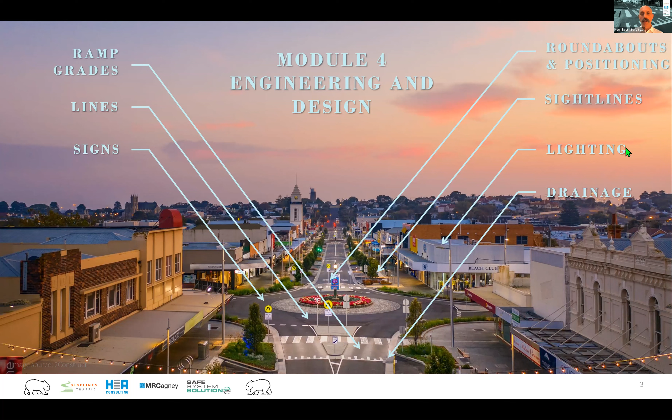Anybody from the Warrnambool region, always interested in people's opinions of the roundabouts. It's a good polarizing the community one, which is always fun.

Okay. I want to start by just really recapping, I suppose, design objectives. And that's come about from a lot of the stuff you've heard from Hafez, from Prue, from Bridget, and it's just sort of reinforcing some of this. But we want to locate those crossings on desire lines for pedestrians and cyclists to ensure that the facilities best serve the road users for efficient and effective crossings. Convenient and traversable by all path users.

We want high alignment with safe system principles, and we want to consider this at a network level. So trying to get that consistency along a corridor and not just sort of isolated picking of crossings, which means that a journey can't really happen for some users or is a very uncomfortable journey.

In terms of design principles, if we jump into that, I'm going to go through these in a fair bit of detail, but I put these days severity first. Now, a lot of designers and engineers don't do that, but I really almost am overcompensating for the lack of view of severity in design, operation, management of our transport network in the past. So there I've got reduce the severity of crashes by managing speeds for vehicles at the crossing and the conflict point. So then I'm thinking about the likelihood.

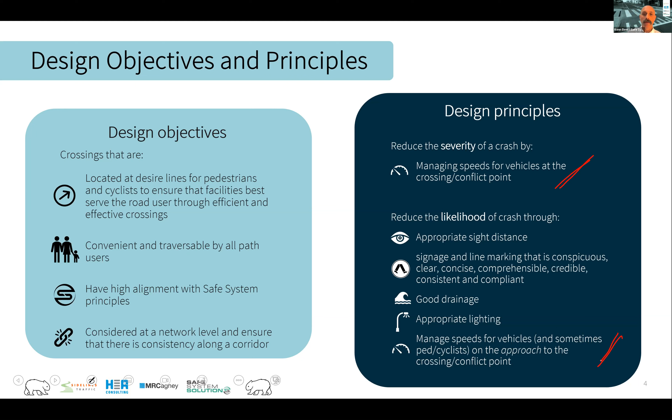So this one up here is about when the crash happens. This one is about trying to stop that crash happening. But I'll get into these in a lot more detail as we jump through it. But I just thought nice few little design principles to start.

But let's get everybody involved, I think, Bridget. Now this one's going to be a thumbs up, thumbs down, or I like it, I don't like it, or good, bad, whatever you want to say. A positive or a negative. So you can see here we've got 2 lanes approaching. This is a 60 km/h speed zone, and you can see we've got the crossing there. So just type it into the chat, either like it, don't like it, or I'm seeing some emoji use. So if you find emojis that cover off your thoughts,

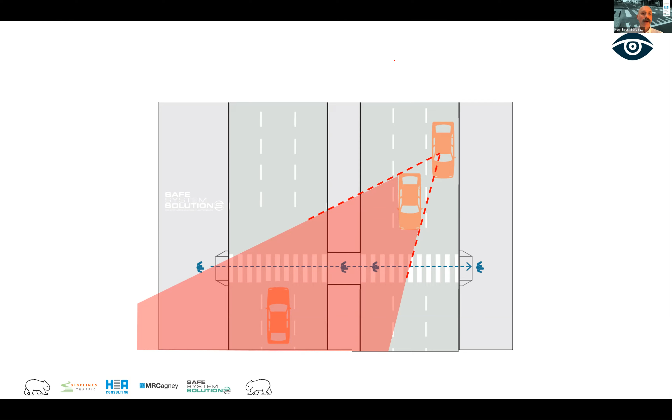But you've got to think about the principles of why these can be an issue and how we can lessen that risk. So let's do another thumbs up, thumbs down on this one, which is also two lanes approaching a pedestrian crossing. And you can see there we've got a somewhat similar setup in terms of two lanes. This one happens to be approaching a roundabout, but give us your thumbs up, thumbs down, or your like it, don't like it, or good, bad, and we'll see what people say on this one.

We've got a lot of thumbs up coming through so far, not too bad. Some people say they're not so familiar with two-lane examples. Some people from smaller, more rural communities, perhaps where urban environments are a bit more simple. Someone said it's okay. Okay. Yeah, I think that there's some significant advantages with this one. The immediate advantage is that it is raised. So anything that happens is going to be at lower speed, more time to react, more time to evade any incident, but also if something happens, it's going to be at lower speed, more within tolerable energy levels. So that's just a big win.

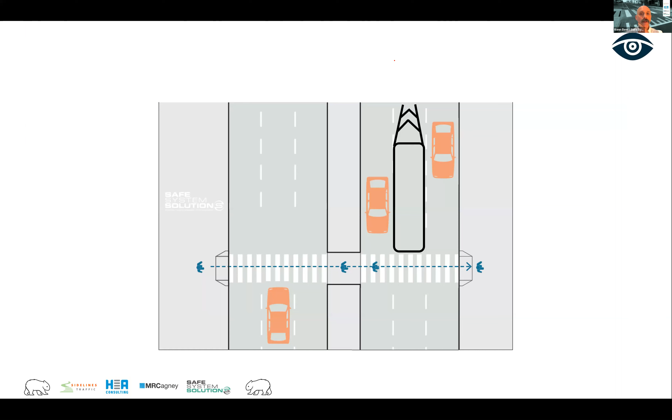The second one is that separation, that sort of refuge island between the two lanes. So if I just jump forward a little bit, same site, and this is in South Melbourne, by the way. Sorry, Port Melbourne. You can see there's a truck approaching the crossing there, but you've got quite good sight lines if you were in this lane. If that separation wasn't there, you can see the significant sightline impediment that would cause if you're running next to that. So, back to that schematic that I put in there, we're really altering that to give that space for a vehicle to be able to see a pedestrian.

Now, there are quite a few scenarios where we see crashes involving pedestrians being struck on these sorts of setups, but when we add this in, they are lessened. There's people overtaking vehicles, slowing down. There's just the ones that I presented, but this is a nice little option. And the raising of it does such significant benefit in terms of further opening up reaction time and sightlines, which I'll get into a little bit more shortly. So I just wanted to start with that one to get us warmed up.

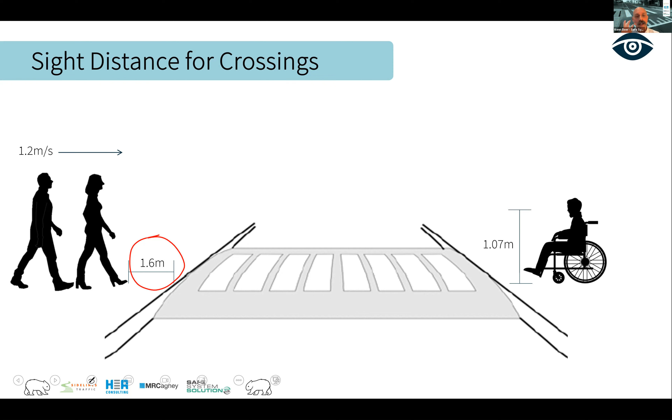But generally, we talk about pedestrians at about 1.2 meters a second. Now, of course, if you are thinking about a crossing where there's something like a park with a track that leads straight in, and we have joggers, and potentially people walking much faster, you're going to have to adjust a factor for that. The distance back we use very often is this 1.6 meters back. And I'll come to that. And then if we're thinking about an eye height for a pedestrian, we tend to go with the 1.07. It's very specific. I think 1 meter would have been fine, but anyway, 1.07. But the general principle we're going for is somebody in a wheelchair or a child, and that's a decent representation. So I needed to chuck those in as initial parameters.

Now, a common mistake, I think, that people make is to simply revert back to what the road rules say in terms of parking on the approach to a crossing. And they use this as a proxy for sightline clearance. So they don't do sightline calculations on the approach to crossings. Now, I think this is problematic in two ways, because there are scenarios where doing that is not enough. And there are also scenarios where doing this is way too much.

And so the first one is bad because we don't believe people will have enough time to react, to evade, and then they strike a pedestrian. The converse is bad because it may mean that we are unable to put as many pedestrian crossings, raised pedestrian crossings out there. So at a macro level, that's serious stuff.

And I have seen councils who just don't budge from this and then do not put pedestrian crossings or raised pedestrian crossings in huge rafts of areas where they want them. But they're saying, well, we can't remove the parking because of all of the chaos that happens when you try and remove parking, which is a whole different issue, which we're not going to get into now. But they want them there, and it's the parking, and then the sight line can't be met. So they go, we can't do it. I'm like, wow, okay, we need to step this back.

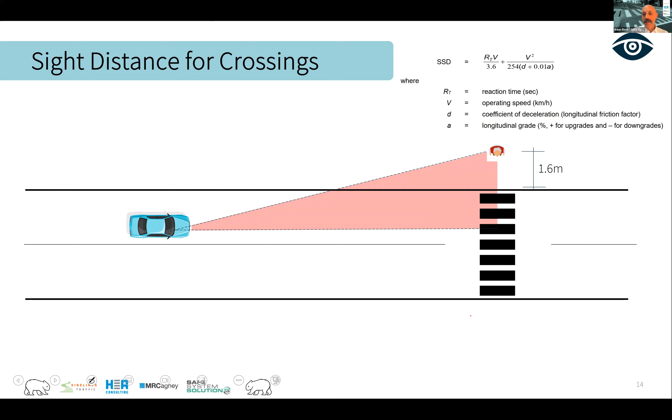Now, let's go with 50 kilometers per hour, 85th percentile flow speed, for example, so you've got an idea of how fast it's going through there. You run that through your calculations, and many of you do this absolutely run-of-the-mill. But you need to work out what reaction time you're going to use. And we know that generally you can use a variety of reaction times, based on the expected environment and the road user's attention to a degree. The large reaction times are very much in high-speed rural freeways and the like, where people are somewhat tuned out. And you go down to a 1.5 second reaction time for these complex environments. There's things going on, it's urban, and that's appropriate to use in scenarios where you're going to put raised crossings.

Of course, you always want to think about the base principles of this before you do it, but that's generally there. Then you think of your coefficient of deceleration and what you're comfortable with. And this is where I err a little on the side of caution, going with the 0.36 there, so thinking about 90th percentile vehicle braking in the wet. Okay. So there are a couple of parameters. You may adjust them, but you're plugging those in. And you do it from 1.6 meters back, as I talked about, and that gives you your SSD requirement, which is 48 meters. Okay, so that's quite a bit of distance that you want if they're coming in at 50 kilometers per hour.

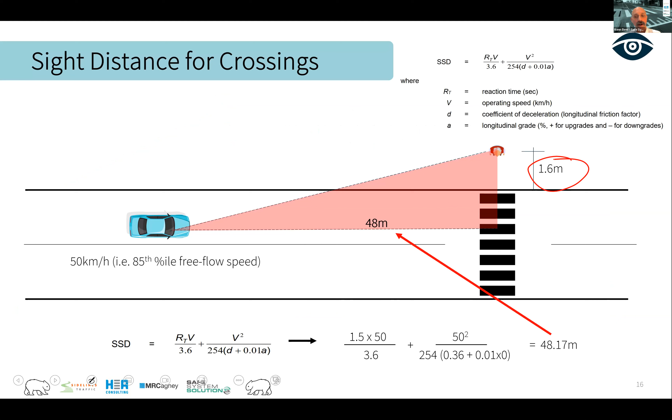So if you raise it then, and this is the raised crossing training course, what do you do? Okay, now this is where industry often goes, oh, I just use the normal zebra crossing one. There's nobody else telling me anything different. So what I find is that we are way over catering for sight distance requirements on the approach to raised pedestrian crossings. And what does that mean? Well, that means trouble in us being able to get a lot of these out. And we want to do what we can to absolutely facilitate these.

So let me give you the alternate way to look at this. And I'm sure some of you have thought of this before, but I'm going to do it. Okay. We're still going to use the same formula, because it's all about reaction time and being able to stop.

So we're going to work out something there. If your ramp grade, so you've designed the grade of the ramp that people will traverse it comfortably at, say, 25 kilometers per hour. This is the other end of the sight line triangle to use. So I'm going to use the same reaction time. I'm going to use the same coefficient of friction, but I'm going to drop that approach speed.

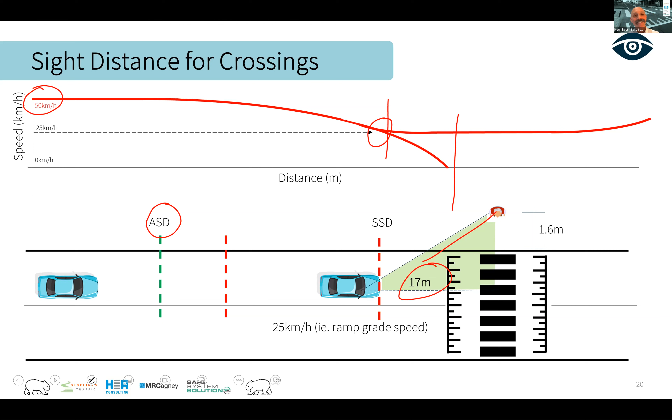So that's just another little diagram just to show we can think about this in a couple of ways. Now, that deceleration I'm talking about, 2.5 meters a second deceleration, we won't get into that. Actually, I lied. We will get into that later when we're talking about cyclists and crossings for cyclist priority. So, tell me though, and I'm going to give a prize on this one, Bridget, if we're having sight triangle issues, I've said raising it's going to significantly help, but what are some other ways we could possibly lessen the sight distance requirement or make it so we're not as concerned about that? Any ideas coming into the chat?

Yeah, we've got one already: upstream traffic calming. Okay, so it's something up here to slow vehicles on the approach. I like that. Give that a prize. I'll give another prize as well, though. Masada said opposite direction traffic. Something we could do about that. Yeah, well, you do the same sight line there. This one has certainly got better sight line often, but you do have to think about, of course, both directions. This is just for teaching purposes.

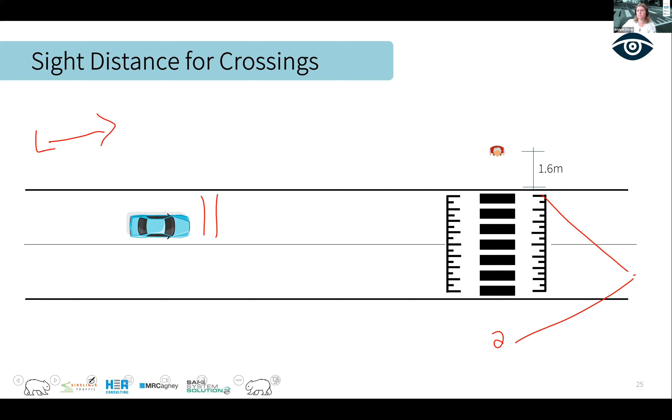And there's been a couple of people said a similar thing, and I think Joseph John was the first to say curb outstands or curb extensions to make the pedestrians more visible, bring them out into the road space. Prize there as well. So I love the fact that two of the things I'm going to talk about have been mentioned already. So it is a thoughtful group, as I mentioned. Yeah, lots of ideas.

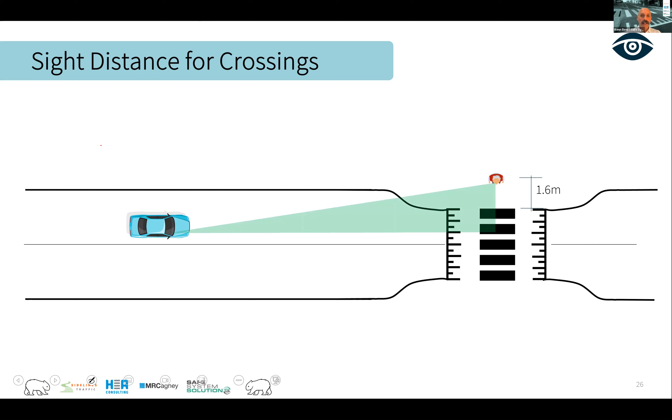But yeah, your curb outstand helps, doesn't it? Because we're pushing that out, opening up those sight lines. So that's one of the reasons we love a curb outstand, or a curb build out if you're from New Zealand. I think that's what you'd call it, isn't it, Bridget? Yeah, usually. Build out. So that's going to lessen your sight triangle.

Okay. There's this really interesting phenomenon, and to me, this is where your details of design interconnect with what we almost believe is important, and I think we stuffed it up. And it may be something that our design standards, subconsciously, if a design standard could have a conscious, subconsciously is written around motorized vehicles.

Because if you look into what sight distance requirements are there for a pedestrian crossing the road at a known crossing point that is not pedestrian priority, right? What we're thinking about is that this pedestrian can see the vehicle, can pick a gap, critical safe gap, and then can dart through that gap. And we've got the typical walk speed, as I put, the 1.6.

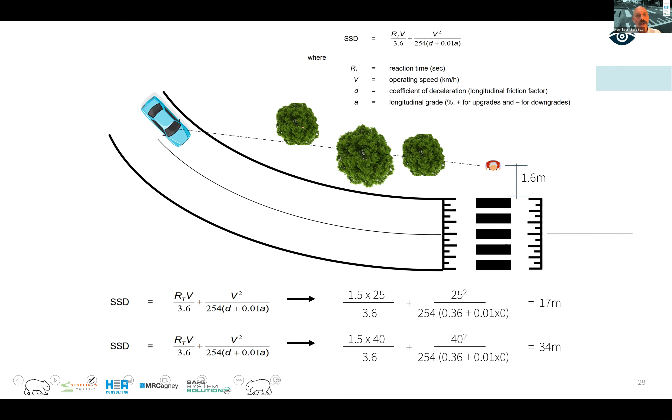So what we can do is think about this as approach sight distance. So a reminder of what approach sight distance is, and I mentioned it earlier. From the vehicle, you need to be able to see at ground level that you're going to have to do something, right? You have to potentially give way or stop or whatever it is. Now, you do that by the vehicle saying, what is that sight line to that facility? So they know that they're going to have to stop.

You say 40 coming in, for example, you measure it along the middle of the lane, and you get it out to 34. So what I'm saying here is the difference between that 60 and that 34 means in some scenarios, it can be framed that we have an obligation to put pedestrian priority, raised of course, at these locations, because we cannot provide a crossing that is safe for a pedestrian if it's not priority, because they do not have time to react and to dart across through gaps, right? But we do have the ability to provide approach sight distance for the vehicle. So they will have time to react and to slow down.

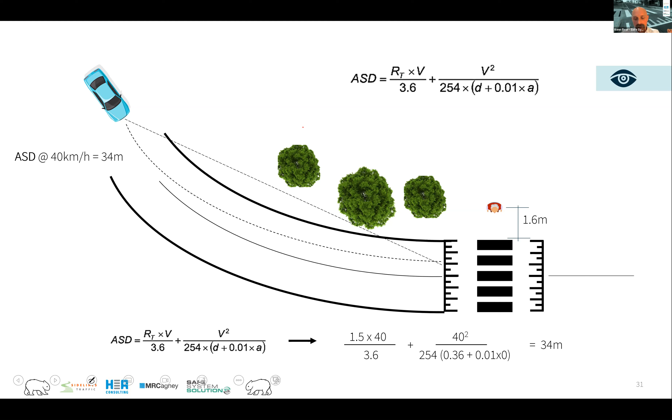They won't meet this SSD, the stopping sight distance, to see that there's a pedestrian, but we are meeting the fact that they do know that. So it's the better of the worst, if that makes sense. Now, the practice, though, is people just ignore the fact that you haven't got crossing sight distance, and sort of push that back as well. We can't do anything else. So anyway, I'll let that boil as I show you where this often plays out.

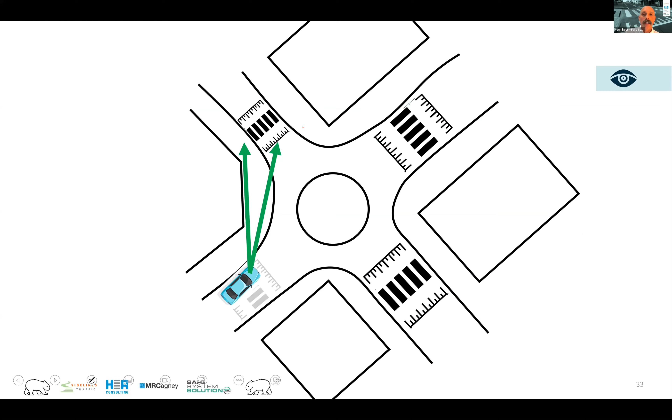Sometimes roundabouts are a good example. So you've got buildings often, and you can't quite meet that. But if you simply are going for approach sight distance, you will meet that, and that makes life a lot easier. That's a wonderful scenario to have. Also, the reality would be that most of the time you'd put speed calming on the approach to all, and then that would slow vehicles and you get better sight lines. Okay. I will come back to slowing vehicles on the approach to crossings to open up sight lines a bit better, but I'm just going to put this one out there.

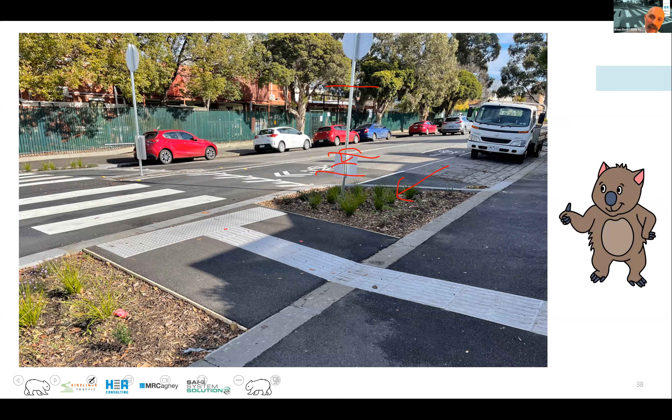Now, this little bit of real estate, oh, it's so attractive to the landscape architects. They want to get in there and do all sorts of fun things with it. And I'm always encouraging of beautifying the areas and the like, but let's keep that to very low shrubbery in those areas and try to minimize the height of anything in there.

Little tip here, and again, I'm back in Warrnambool, lovely Warrnambool. And I think this one's really nice. I think they've done a great job of it. But the tip is to ensure that your angle parking, if you're going to use it, it's not that somebody backs onto the crossing. So if they were to utilize this spot as actual angle parking, you just have some issues often where people back onto the crossing, and it's not the biggest road safety issue out there, but it causes disruption to people's ability to cross and walking around it, and there can be more minor incidents.

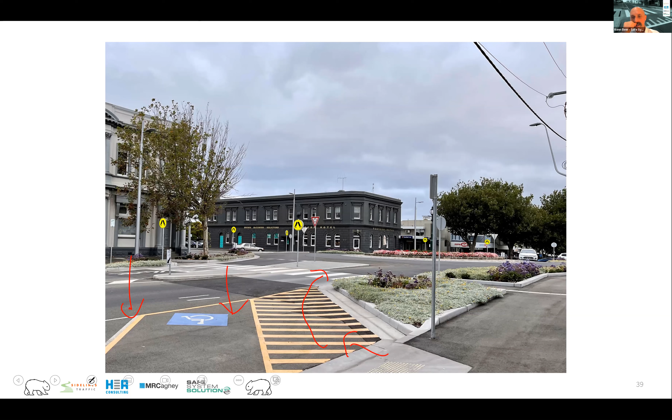But I think this is just a nice use of the disabled car park and the area next to it, and it's open and just works nicely. Nice little design. Okay.

Right, we talked about pedestrians walking towards that crossing. And now I want to think about, what about if we're providing a shared path crossing or a cycleway that has priority across a road? And this is becoming more and more popular, and that's fantastic, right? We're starting to see that in a lot of circumstances, it is right for us to prioritize these modes of transport across a road. So what speed do we talk about for a cyclist approaching? We've got a 1.4 eye height as the one to take there. But what speed are we talking about?

Well, you can go in and have a look, there's a good little bit of literature on this, and I've snipped one of those tables for some different uphill, flat, and the like, so you can get a bit of an indicator on that. TMR in Queensland, they talk about 15 to 25 kilometres per hour, and Victoria will talk about 20 and 30, and I'll take you through that shortly.

But the principle is that, of course, a cyclist is going to be coming in faster. Thus, we're going to probably need to provide some bigger sight lines or some other features to ensure that we've got those sight triangles appropriate. So if we pop in there the 4.1 to 6.9 meters a second on the approach, and we've got that 1.4, let's start to unpack how we're going to work this out.

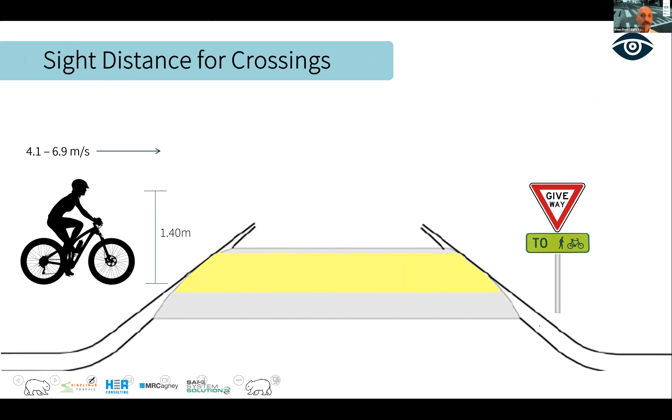Before I do this and start getting into some calculations, we've got a few scenarios. We've got a cyclist-only facility that crosses a road with priority for the cyclist. We've got a shared path facility, and I showed the previous one had the yellow, which is often used as a shared path, but some jurisdictions do them. And then you've got these sorts of scenarios where you have a raised pedestrian crossing, a wombat crossing, zebra crossing style thing, and a bike priority crossing as well.

And in these scenarios, when you're thinking about sight distances, you take the worst. And the worst will be the faster of the two coming in, which is going to be your bike. However, you might want to adjust a little bit on, say, this scenario out here, because a bike is going to have to slow to make that turn, aren't they? That's very different to a scenario where the bike facility comes straight across the crossing without that turn.

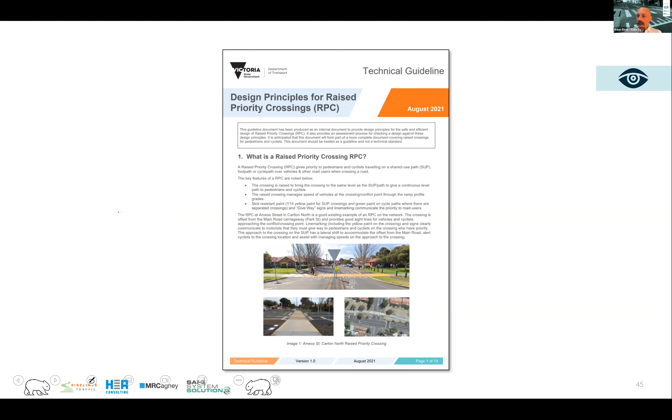I think that the best document out there, or that's done the most thinking about this to a degree, is the Victorian Design Principles for Raised Priority Crossings document released last year. There's some good thinking in this. Like any design, you need to be context sensitive, you need to think about your local circumstances and all of those sorts of things, but I think this is a good starting point. And I'm going to walk you through how to think about those sightline parameters. And then we'll have a pause for a coffee break, I think.

Okay, so the way this works, and I've put that actual document in the learning management system in the resources, but you can also look at the notes here. The way you do this is again, it's based off, say, intersection sight distance or stopping sight distance. But what we've got here is what we call a travel time. Now these travel times are scenario dependent. So we will think about a travel time for a high speed environment being 5 seconds, so some observation time and reaction time, all the way down to these very constrained scenarios, urban environments, low speed and the like, where we're dropping our travel time down to 2 seconds.

Now, for the real design fanatics out there, travel time is usually called decision time in some sight distance calculation workings in the background. But the point is that you're going to think about, okay, what is the scenario of this crossing generally? What's this environment? And then you're going to pick one of these that's appropriate.

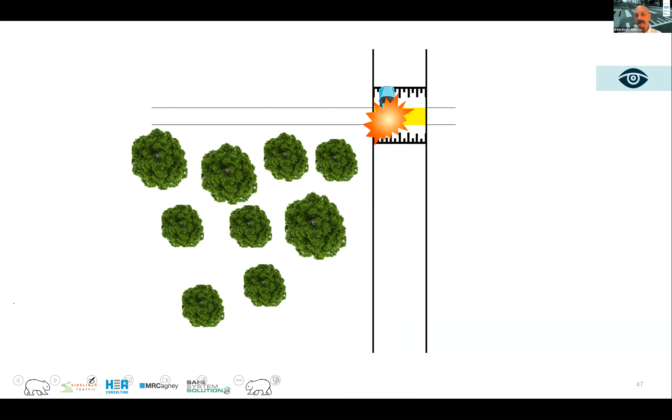Okay. So what we're trying to stop here is that scenario where there was just not enough time for the vehicle to see the bike and the bike to see the vehicle. So we're going to want to have some sort of sight line opening. And I realize as I do that, a tree disappeared, which we just talked about. That's not the idea. I should put something else there that we can get rid of. But what I'm going to say is there needs to be a distance back for the cyclist, and there needs to be a distance back set for the vehicle. For our pedestrians, we were happy with the 1.6 back, but we're not okay with that for cyclists because of the pace they're moving. But what distance back do we go?

So once we do have appropriate sight triangles here, we know that we're either going to have the vehicle approach, see, and stop, as you saw in the little video of myself riding, or we're going to have the vehicle overshoot it for some reason, but the bike will have enough time to make that decision. Oh, okay, this doesn't look like they're stopping.

So what we're going to do, I've got 3 different scenarios, but let's take this one, which is actually quite a common one now. I really like it, where we're seeing a shared path or an off-road bike facility running parallel with a major road. It's usually because we've got road reserve there, and we can use that to build this facility. We separate it because that's really highly aligned with safe system principles, because you're not mixing it with vehicle traffic.

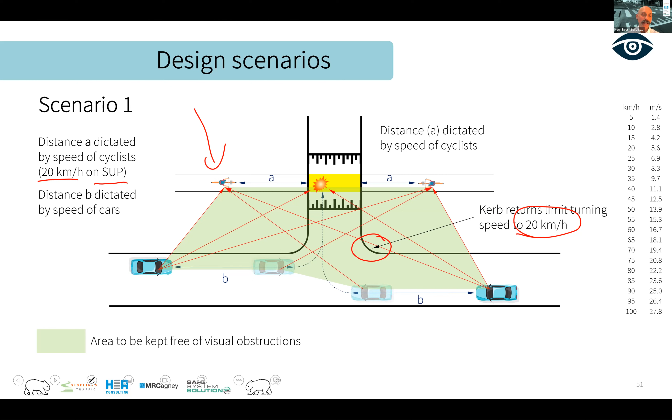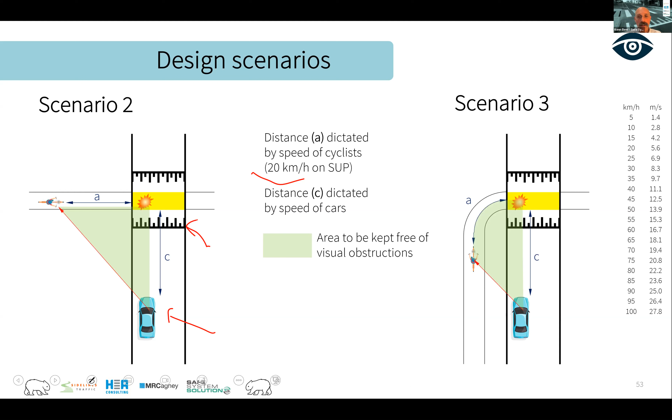So you've got those parameters, or it could be this one where you're going to take shared user path in there, and you're going to take your usual 85th percentile speed of vehicles approaching, or if it's raised, which you hope it is, you can go back to the thinking that we had before. Sorry, same scenario, it's just sometimes we see them crossing like this. You're going to pick that travel time, and then you're going to go to this table, which talks about a distance A, which is how far back the cyclist would be.

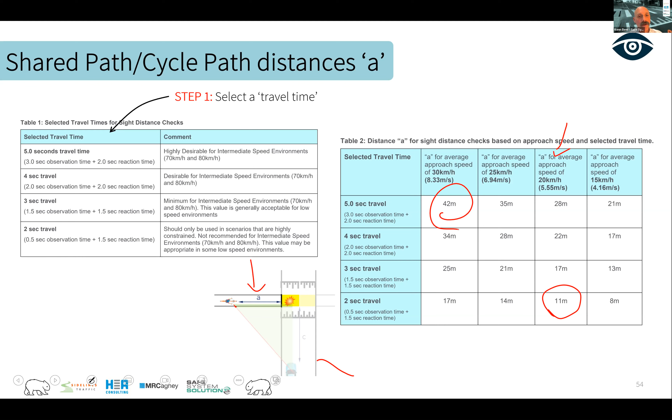And you can see there, for a shared user path in a constrained environment, you've got lots going on, we can talk 11 meters back is what we're thinking. If you've got a cyclist-only facility and high approach speeds down here, we're talking big sightlines. Now, I'd be concerned about these ones with the high approach speed of vehicles. It's always a concern, but that's the sort of way you use that table. And you can see there that you've got different speeds in there for the approach cyclist. You pick one of those.

And then you get your B or C, again from another table. You've already picked what your travel time is. You're using the same scenario. And then you've got the operating approach speed of the side road there, or in this one, it's the speed of the vehicle here, not the 20 km/h turn one, it's that approach speed, so time to know that they're going to have to react. So hopefully that clarifies it. There's a few assumptions in there, 2.5 meters a second deceleration, flat terrain. You may adjust for those.

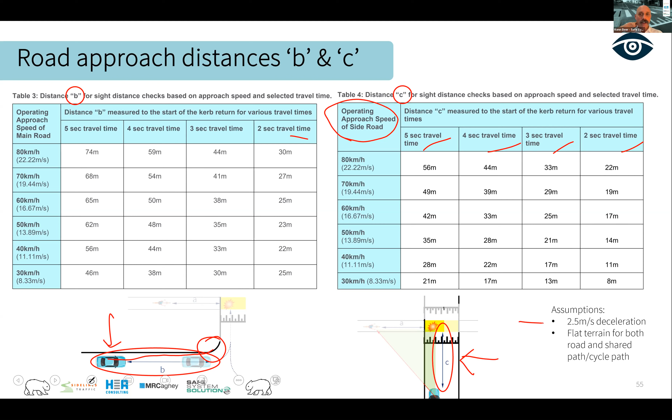So in these sort of scenarios, if you've got a 3 second travel time, you're going to take a 20 km/h shared path speed of cyclists, and if you've got the blue vehicle coming in at 50, for example, you may elect to go lower because it's raised, but you can see there that you're talking about these 17 and 20.

No, I was going to get everybody to answer that for me, but I think I'll just go through these myself, and then we'll stop for that break because we're about half time.

Okay, so if you can't meet those things that you spit out, well, you can implement speed management for the cars, okay? And that's going to help.

And we heard somebody come up with that idea, advanced speed management. Further advanced speed management is good. You can also slow the cyclist down. And there's certainly lots of examples from around the world of raised speed hump style for cyclists, but also the chicaning in. That can be also an advantage if you have a side road coming in and you've got a bike path that's running along here, and you deviate it back like that.

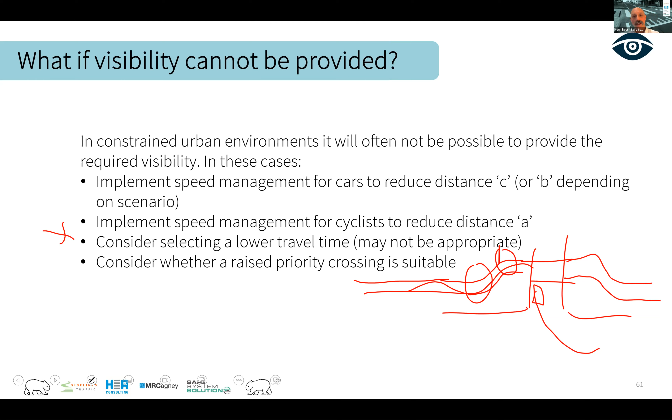I was really pleased with my many discussions and challenges with the Department of Transport on some of this, because it's a little bit conservative to a degree, but they said since its release, and they've been involved in many projects, this guide note has never stopped a priority crossing for pedestrians and cyclists going in. It's simply that they've worked to do things like slowing the vehicles on the approach.

And there's a couple of questions here. One about if we do speed management for cyclists, which I know is not necessarily something that we've got a huge amount of evidence about effectiveness and things, but does that affect Disability Discrimination Act stuff for pedestrians, especially if it's on a shared user path? On a shared user path, that probably wouldn't do it, right? Question. Yeah. Bridget, you're probably in a far better place to answer that.

But certainly where it has been done has been on dedicated cycle lanes. That's where I've seen it too, and I think it's like you've been saying the whole time. It's context specific, and so you design something that works in that context for everybody. And sometimes that means compromise, but it wouldn't usually mean legal compromise in terms of breaching an act. So you're on the side of the safest accessible way to do it.

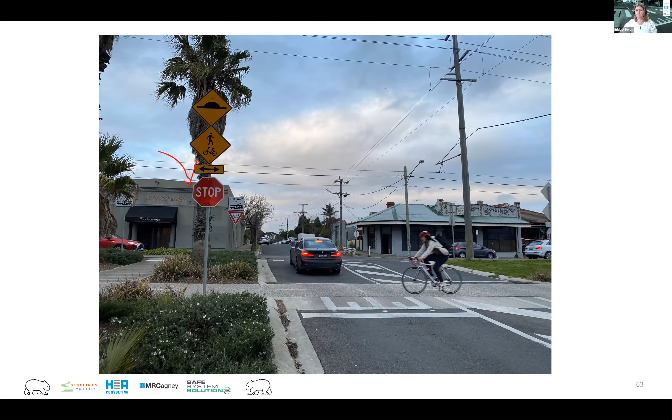Now, to a degree, in these environments where they're high place value environments, and you've got people walking and cycling and stuff, I'm to a degree fine to go right up on the hold line. It's often closer to pedestrian desire lines, so they can walk through. However, I don't like the fact that when a vehicle is waiting, they will often be on the crossing, and that then just creates scenarios where pedestrians would have to walk around. We've got pedestrians with mobility devices, and that can be a bit messy.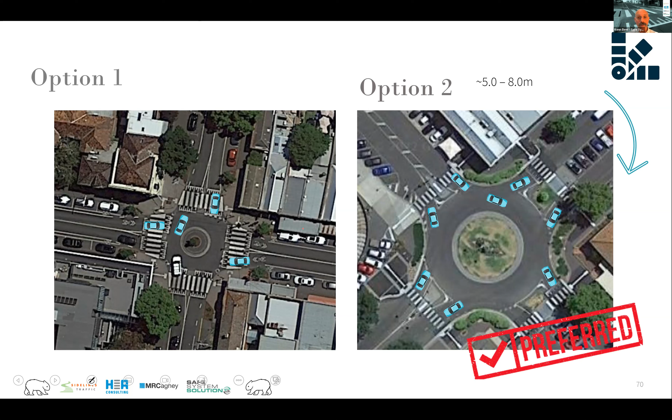You know what else I think, Ken, that I like about option 2: there's kind of a political balance going on with convincing other transport professionals that raised crossings are a good idea. So sometimes, in terms of picking your battles, if you put them slightly further away from the desire line and you get that through, that's way better than not having them at all. Agree. Yeah, I think it's a great point, Bridget. Thank you.

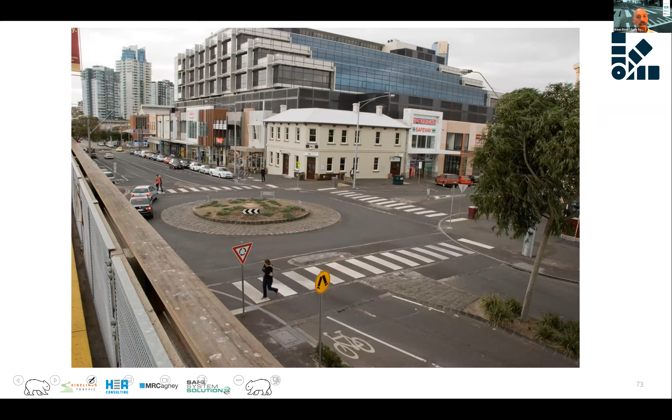And there's an example of just that, set back enough for a vehicle to prop and wait out of the circulating carriageway, so you still get a bit of roundabout flow going on when somebody's waiting for a crossing point. So another pretty nice scenario there. There you can see the one which is at the crossing hold line, which again I don't think operates badly, but I just pop it up there as an example.

The other one I wanted to talk about is angle of approach, and this goes across the board. Anytime you're raising part of the road network, vertical deflection, a raised crossing, a speed hump, whatever it is, you want to do it perpendicular to the travel path for vehicles. And that's so heavy vehicles don't destabilize, so motorcyclists aren't on a lean or destabilized. It's a little bit better for cyclists as well, though not as much of a major issue.

But here's an interesting one: raising a signalized crossing, which I think is an awesome thing to do. I do like raised signalized crossings as well as raised signalized intersections. But this one has some problems being on the curve. So I'll give a prize out again, Bridget, hopefully you're taking note of a few prize winners. What do you think we could do? Do we have to abandon the idea of a raised signalized crossing at this location because we can't get it perpendicular? Anybody got any ideas?

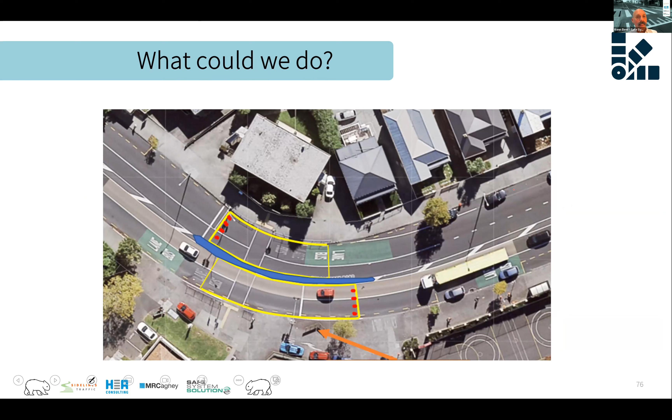Now, I've collected together some guidance around pedestrians and cyclists at roundabouts. TMR Queensland has done a lot in this space. Victoria's done some stuff, and Austroads continues to work on it. They're a little bit slower in getting their stuff and moving along. But I've put those into the learning management system. I'll show you at the end where all of this is, so you can get into it to your heart's

content. Ken, there's just one specific question here about best practice on bus routes with offset from the give way line to the raised crossing. Does it make any difference if it's on a bus route? Yeah, I'll talk about buses shortly, and I think to a degree we'll cover that. But let's talk a little about where we get to thinking about buses, because they're an important road user.

It's a nice example. Okay, so somebody wanted to talk about ramp grades, and I'm going to talk about lengths of platforms, ramp grades, and the like. The general principle. Okay, let's start real basic. The sharper it is, the lower the speed vehicles will go over. Now, why are they going to go over it at lower speeds? Well, they see it and it's sharper, they will slow down.

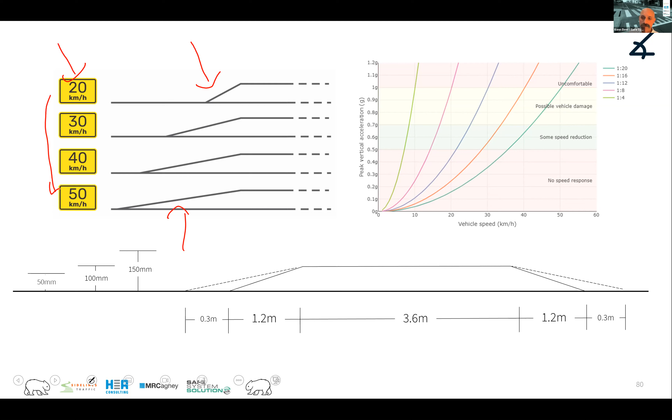But also, people get to know how bad a speed hump is, or a raised platform is, or a raised anything, and they're common users of it, and they act accordingly. If we sign it 20, but design it 50, people work that out and they start to drift down to that. I'm going to show you a few things here.

I'm going to use a fairly run-of-the-mill common raised crossing, Wombat crossing scenario here with a 3.6 metre platform length, ramps 1.2 metres long, and 100 mil high. Quick prize, somebody tell me what the ramp grade is on that. Anybody? 1 in 12. Yes, Jim Hondrakis. This is great. We've got lots of different prize winners. Yeah, Jim's had a win. Yeah, it's 1 in 12.

So you're basically saying you've got 1,200 and you've got 1. So you've got the 100 high and 1,200 long. So we talk about ramp grades in 1 in 12s and the like. I see somebody put in degrees, which we don't. Yeah, funnily enough, we don't use degrees on that. We use 1 in whatever. So it's 1 in 12.

A flag now, and I'll come back to this, but you've got to think about the slope of the road that is approaching it. So, if it's like this, you're going to have to think about that and factor that in to that difference.

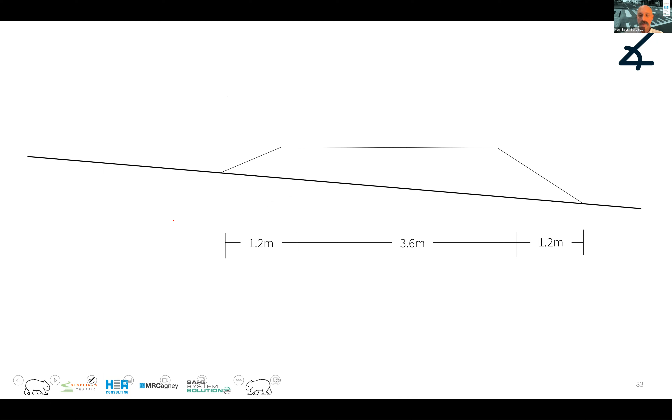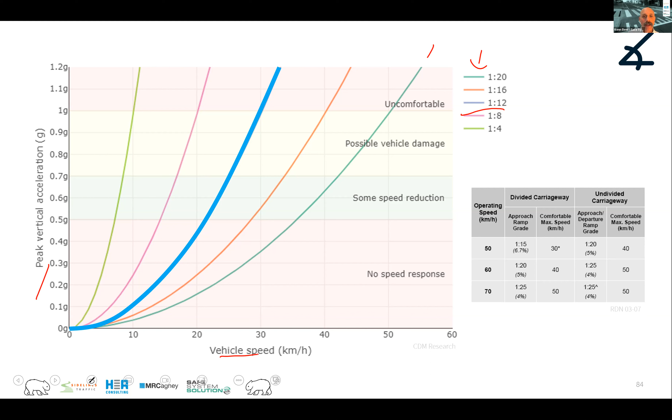This diagram is extremely helpful in us understanding what we're trying to achieve and what we will achieve. What it does here is shows us for a 1 in 12 there, and you can see blue's 1 in 12, and you've got your other colors over here. And what it shows is the peak vertical acceleration that a vehicle will get at speeds traversing this platform grade. Now, what happens is that people will roll themselves into that green naturally. Okay, so that's how you start to understand the vehicle speeds that they will go to.

So you can see there, that's the 1 in 12. They're going to be around the 20, 25-ish. We go up there to a 1 in 16, so it's flatter, right? We see that that's going up now around the 30. So it's really helpful to you. I've also put some ones for higher speed. These are usually intersections when you're raising intersections in higher speed environments and you want higher vehicle speed through.

Is there a link to the CDM research? Great question. I don't think I put that into the resources, but yeah, I've got a note for us to make sure it's a link in there. Yeah, I will pop that in because it's good. It's very good stuff.

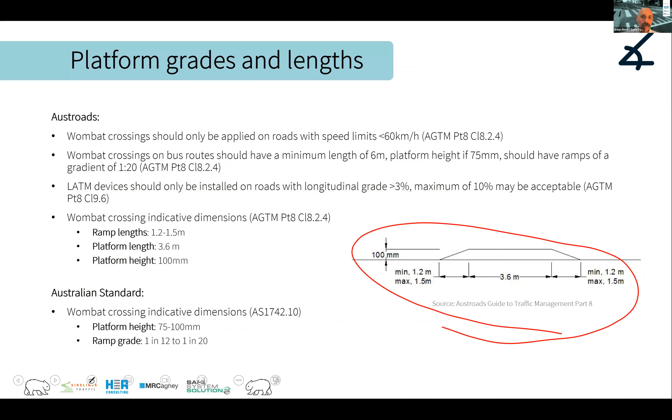And I've also done a little bit of help for you in collecting together the different guidance around this, so you don't have to go looking through all sorts of things. So we've got the Austroads stuff in there. We've got the Australian standards, which does talk about this pretty generic setup. We've got some TMR stuff. This blows my mind. 150 mil high. I'll show you why later. I'm just wondering which scenarios that would be, but anyway, it's just very high in my opinion.

And some Waka Kotahi stuff as well. So I won't go through all of that in detail because I'm giving you the general principles again, and you can delve into those for your specific jurisdictional guidance. But if we think about the heights of this and the lengths that you might make them, I mean, you can conjure up any scenario you want.

You can sort of extend the length of the ramp, which is going to change the grade of the ramp, and thus people will be able to go faster over that with less disturbance to them as a driver. You can go higher up to that 150, and if you did that at a 1 in 2, you're in a very sharp and very low speed. You could extend that out. You could have very low at a 50, which is in some of the guidance. So you can see you can alter these and change these as you like, referring back to what the ramp grade you're producing is.

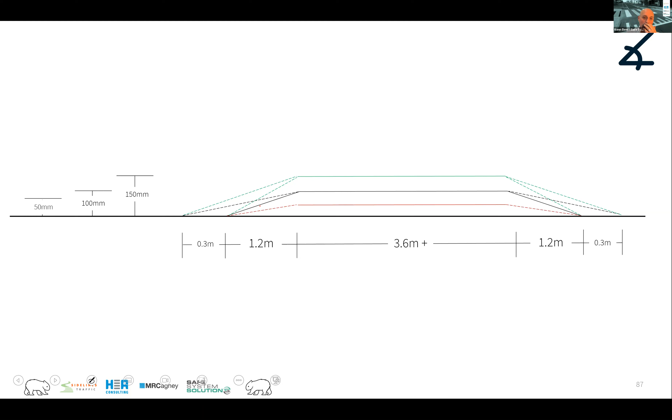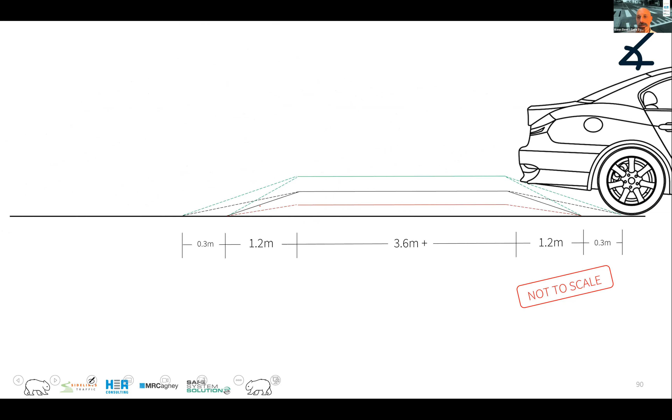But when are you going to use these different scenarios becomes the question. Well, what we're trying to ensure is that vehicles slow down, right? However, we've got to think about ensuring that vehicles can navigate over these without scraping here, without getting caught under there, without dropping their end on it. Now, this one doesn't have a long tail, but you do have some vehicles with a longer tail, and then not scraping and getting caught on the way out. So there's a few scenarios to check through. And it potentially noses out as well under some different scenarios.

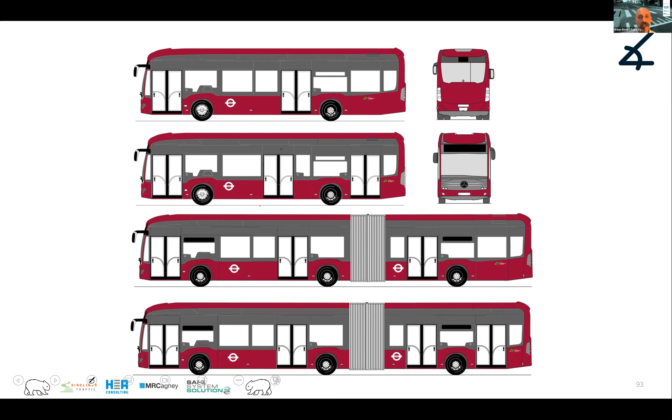So there are minimum vehicle regulations, right? So a vehicle cannot be lowered to such a point that we can't really be designing crossings that will do any speed reduction, because we've got to take this super low vehicle into account. So there's minimum vehicle regulations in place, and there's truck regulations as well. But buses become a really challenging one for us. But if you've got a bus route, it absolutely does not mean you can't have raised crossings or features to slow vehicles on the approach to a crossing. It just means we need to think about our designs very carefully. We may not be able to take the stock standard design off the shelf on a bus route.

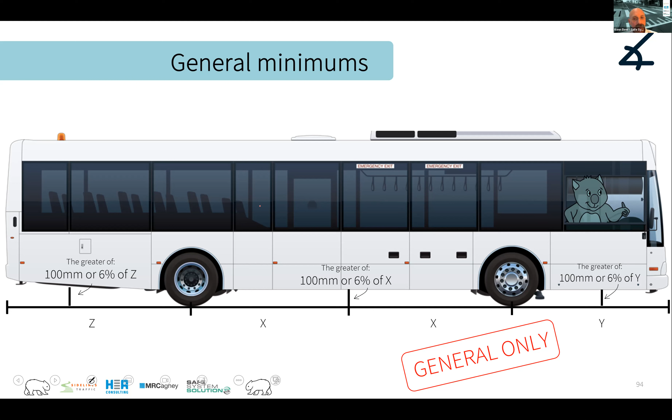Okay, so we're going to get into a little bit of thinking about it. Lots of different buses, but let's talk about what the general minimum bus would be. So this will be your lowest bus in most jurisdictions, loaded up, and it'll be higher than 100 mil. It'll be 6% of the axles there, 100 or 6% of there, and the same out the back. Okay, so that'll be your absolute minimum. You're not going to get buses lower than this, which means we know our absolute worst case parameters.

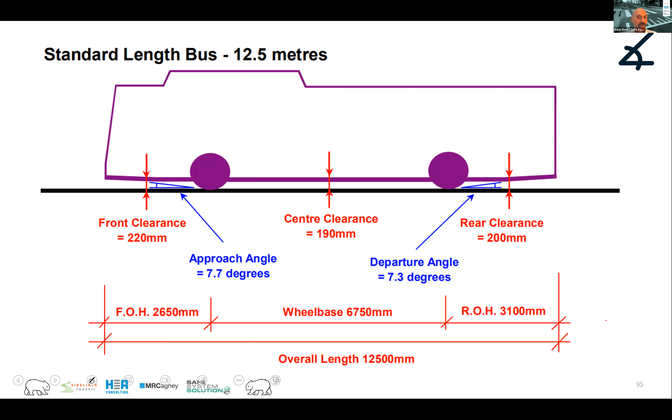And here's some more standard buses. You can see there's a higher clearance usually on a 12.5 meter, and some even higher ones, and articulated ones as well. I'll pop them in for your reference, because remember, I'm just talking principles here, and you've got to work this out a little bit yourself. Okay.

Loaded up, low bus, and not even going to make it over the 150 high. So yes, you might have a lot of scenarios where you have a higher bus, but then we'll get up onto that, and we don't want it to be stuck on top of it like that, as you could imagine. And we don't want the back of it to be stuck as well. National Heavy Vehicle Regulator and jurisdictions have some pretty good information about the specifics of different buses if you're trying to be specific about what bus you're catering for.

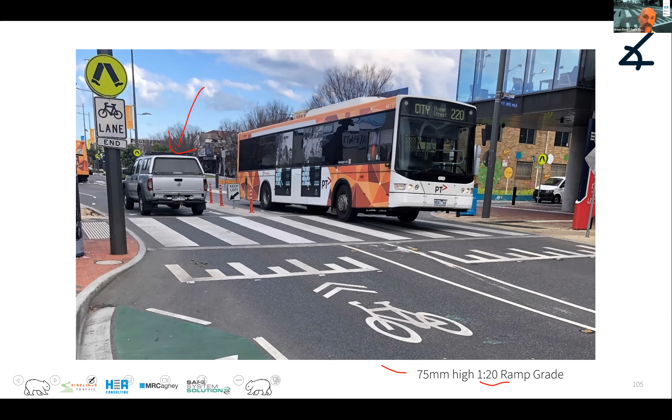There's a possibility to have longer ramps to get both bus wheels on, which can help you a little bit in ramp grades, but I won't go into that in detail to save us a bit of time. Now, this is an interesting one.

So if you really can't make that all work, or the bus people are just so determined that this is not going to happen, this is where I think we need to be a little bit creative and go back to what is the principle we're trying to achieve. Our number one objective is to slow vehicles at the conflict point, but then also on the approach. So we can slow vehicles in other ways.

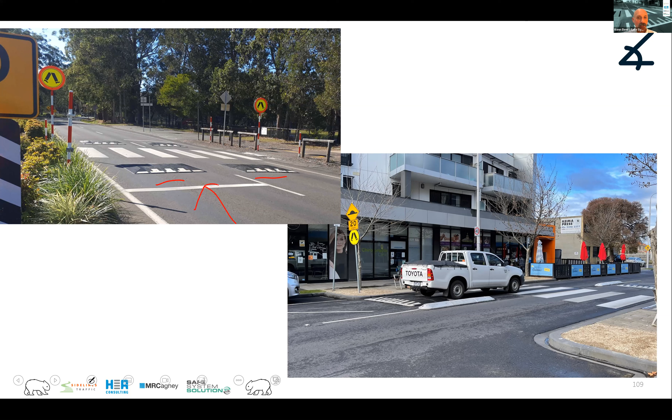I do recommend, as you see here, having the two on both sides, even though you're only slowing the vehicle on that approach. You can see on this one that they've put a little separator there. You do have the danger of vehicles navigating around it like that at different hours. But extend that a bit if you're going to just do one.

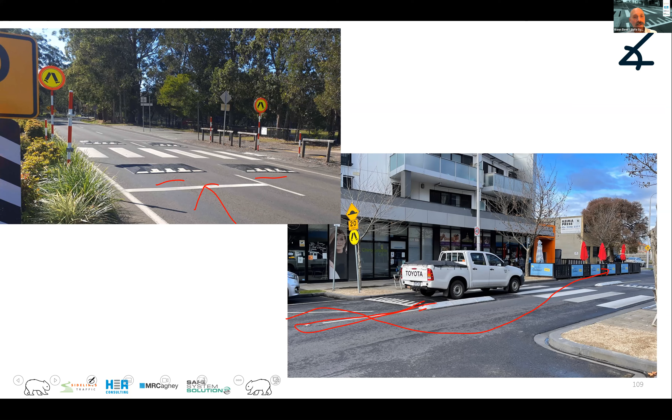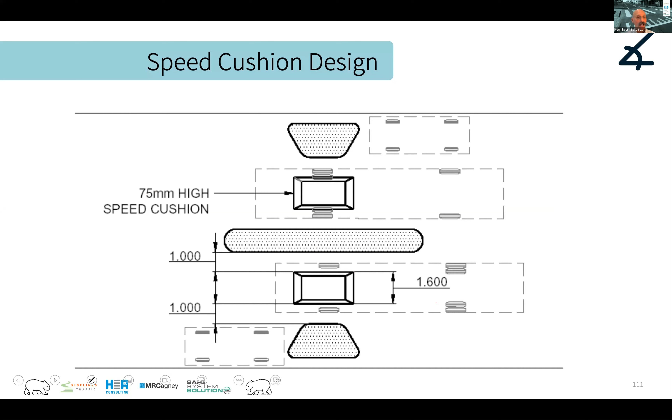You can also do asphalt ones of these for more permanent treatment, and they're essentially doing the same job, not quite as good, as I say, not elevating the pedestrian for sight, not providing that consistent path. But if the option is nothing or this, go this. And there's some specs on cushions and how you can design them.

And also when we're thinking about ramp grades and the like, there's not a requirement to have the same ramp grade in as out. The scenario where you would want to make sure that's the case is if you had an undivided road. So you've got a divider here on this one. That's kind of important where you've got two completely different ramp grades on entry and exit, because if you didn't have the separation, you'd have this weird scenario where it would be possibly destabilizing.

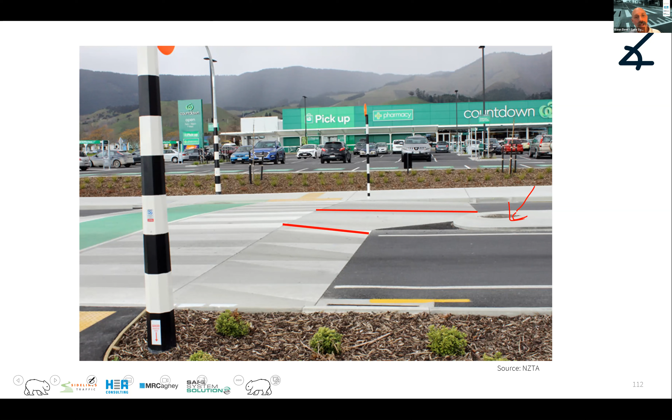But this could be pretty helpful in some scenarios, and I'll show you one now. Actually, one of the past participants put this in as a question during the course: how would you rethink this? Do we have to abandon the raised crossing because we're on quite a slope here coming down the hill? That's going to present quite a few challenges for the ability to clear buses over this. And it is a bit of a bus route.

So how do you think about this and design it in order to be able to cater for that? Or do you just have to abandon the raised crossing? Well, this is, I suppose, the scenario. Of course, I've exaggerated everything here to make it very vivid so we can all see it. We've got the bus coming down the hill, and we've got this because we're trying to make the path flat. So the bus will get stuck.

So you can alter your angle. Now you can't go too far with this, but you're certainly able to alter the angle there. And there's a discrepancy between Austroads and Australian standards on this. Well, it's not a discrepancy, it's a clarification that if you're using asphalt, you can go a more severe angle on this.

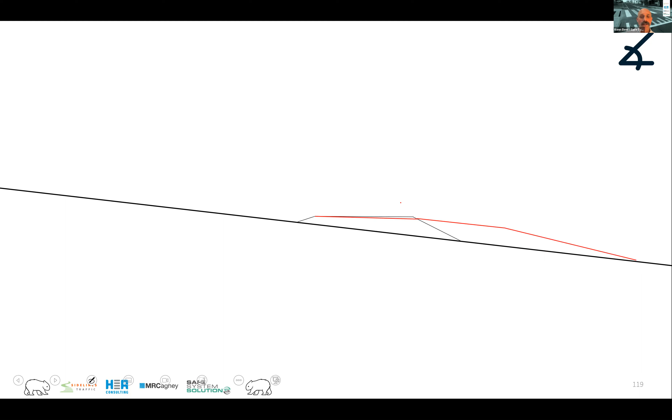But you can extend the out ramp as well, because remember, we're just trying to slow vehicles on the approach. Once they've slowed, they don't care. You could flatten this out to eternity if you wanted. So you can really start to play with that exit. And you can create scenarios where the buses can go both ways, but it's a slightly altered ramp. Now, there's a little bit more cost to it, but you get some pretty big advantages.

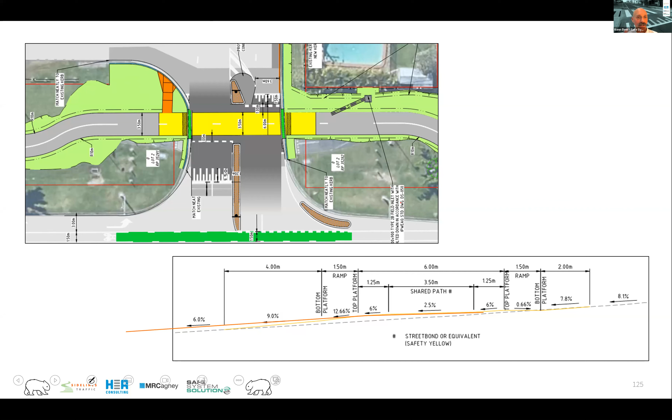So something more like that in these scenarios can be really useful and successful, and you're still getting what you're trying to achieve out of this, with very different entry and exit grades there. And again, if you go into the details of that and work out that we can't do that, that's where something like a speed cushion on that approach would be the one, because that's the one you're really going to be dominantly worried about. This one's going to be slower because they're coming in. You wouldn't really want to put a cushion there, because a vehicle is turning in there and they're going to get some weird angles on that.

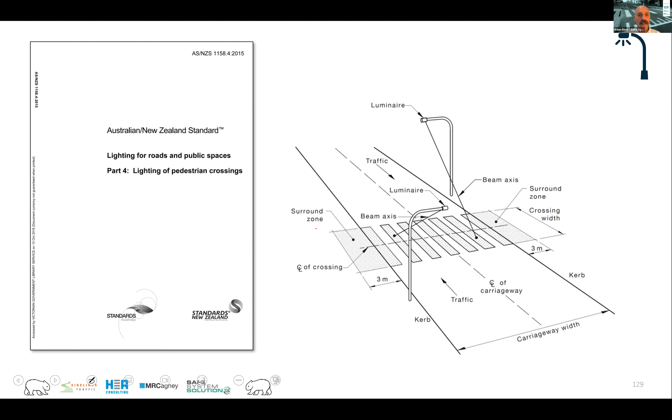A document that many of you will be familiar with, 1158, is the lighting of pedestrian crossings. Again, predominantly thought about for not raised crossings, so there are some challenges there. But the theory is that you want to be lighting from both sides, ideally, and if you do a very base level first principles lighting assessment, you've got a vertical plane and a horizontal plane of light that you're trying to deal with. So you're looking at lux levels at these different points: one at the middle of the crossing, and one at each side of the crossing. So that is the way you'd do it.

The lighting of these different shared path crossings or cycleway crossings goes back to those distances A and C or B in those different scenarios, and ensuring that we've got it lit at that point, but also through that point. Do we need a light back here? Well, not so much, because the headlights will be enough of an indicator for the cyclist to see that vehicles are coming. Now, TMR has a 10-meter setback. In general, I prefer to work it out myself, but that's up to individuals.

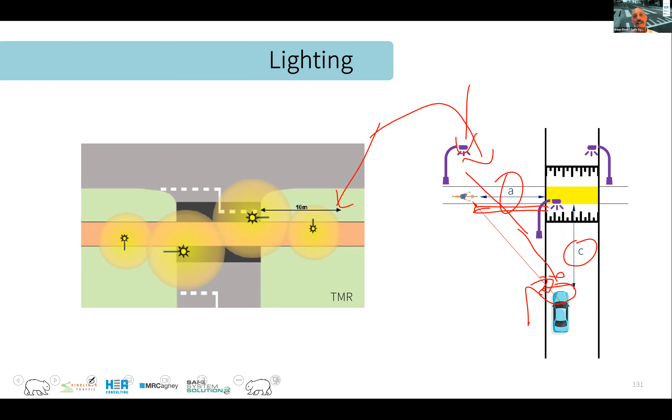Drainage, another challenge that often comes up for our raised crossings. I'll go to our diagram here of ways to deal with the deluge when you're thinking about raised crossings.

I'll show you some examples, but if you've got the ability that you can have a fairly flat approach and ramp up over a period, it is accessible. It can provide that facility. If you're coming in steeply and then going up, of course it's not going to work for people on mobility devices and the like.

Then there's the box drain option, and then pit and pipe to get the water under, and you'd probably have to increase your pipe size and things like that. So let's just look at these in a little more detail. So that's the one,

where we go underground with subsurface drainage. This has got cost, and this often is where people get to and they go, well, we can't deal with the water, so we can't do the raised crossing, we can't do the raised facility. Again, if you can do this and it fits in, it's great. Let's do it. But don't let the fact that maybe you can't do this stop you from having features to slow vehicles.

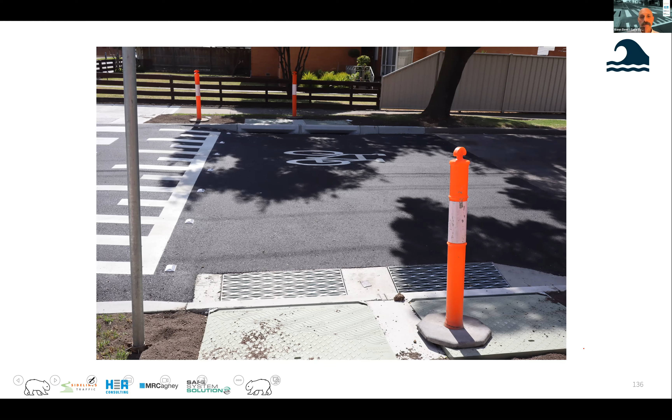The next one was that box drain, where we're laying a plate over the existing drainage channel and connecting it up. So we get that nice flat run through for pedestrians and the like. So this is pretty good, except it does potentially clog up and you need to maintain it. So there's an example. Again, it's a nice one, isn't it? It flows through nicely, keep your bluestones, and everybody's happy.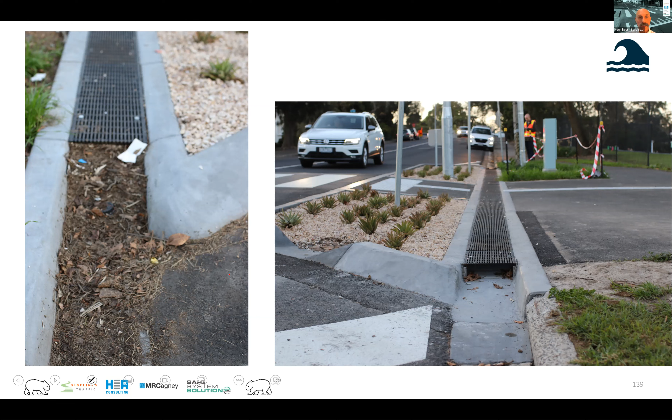I just happen to have these photos handy of this one where it's got leaf litter, it's clogged up. So you need to factor this in, and it does need regular attention, which is annoying. But again, the facilities can be provided. We just might need to do a little bit of work on it. Providing wider ones could be better. They still can clog up. Of course, other drainage facilities can clog up as well.

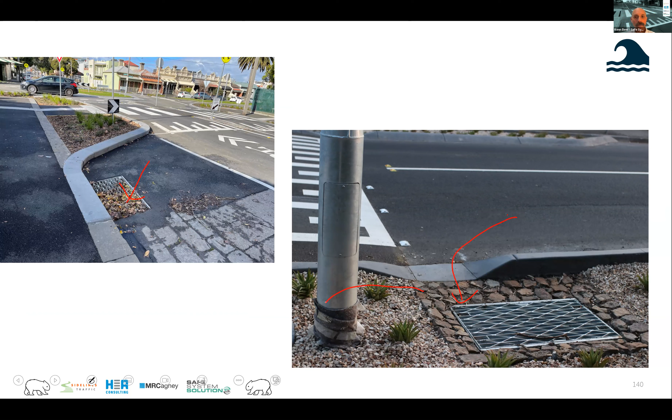So these sort of features where you can cut out your curb there and flow water in, I think are quite elegant, and you can provide really nice features with that. You can often use these areas as mini swale areas or retarding basin areas where the water can flow. You could have rainwater gardens and nice beautification. I'm not a water sensitive design expert, but I'm sure you've got people you could talk to about how you could utilize these big areas in a nice way. So there's another possible win.

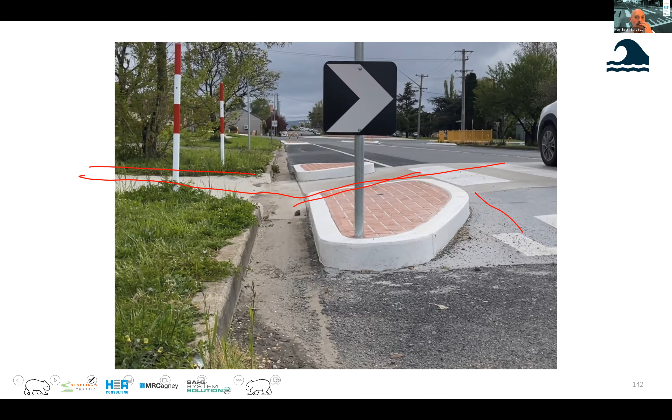So I think I've talked about this enough, but this one I actually think is okay, and I watched people in mobility scooters navigate this, and they were fine and able to do it. The distance there is important; the ramping up and the flattish entry is the really important part of it. And you can see this sort of stuff can work quite well in different scenarios, but you need that ability to ramp up over a distance.

This one, though, I don't think is going to cut it. This is where we're seeing quite a drop down and then that raise up, which is going to be very problematic for users of different devices.

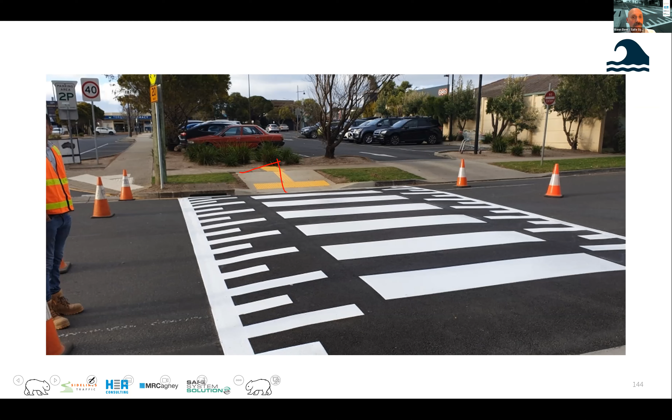And this one is one where I watched this lady slowly navigating up this. I thought, it would have been nice for her not to have to slowly do that. Then I thought to myself, well, pretty happy it's a raised crossing, so vehicles are going to be going slow anyway. And I wonder what the challenges were associated with drainage on this one. I wasn't involved in this one, but I think if you can push for that consistent grade, it's better, but don't dismiss the raised crossing.

So the other option, the one that I probably didn't put in there, is to go to speed cushions, if you absolutely can't deal with your drainage challenges, or the road is some critically important floodway or something like that.

The last few minutes, and I'm going to point you at lots of documents anyway, so you'll be able to follow them up. But of course, looking forward to your emails and phone calls about your specific issues, because I may not have given you enough on specific ones.

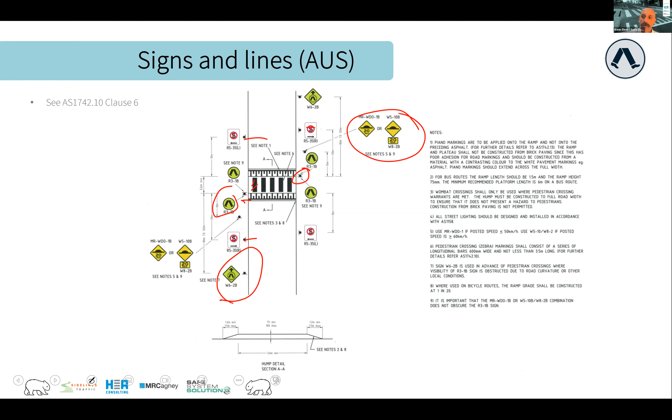Now, that's a lot of signs. And it ends up, you're finding lots of signs on a particular post. Reminder there, 2 metre on that, just so people aren't hitting their heads on it, and it's not also blocking sight lines. But you do get these sort of many signs on a post, or many posts.

This one, interesting one, people going nuts about, you can't put 2 regulatory signs on the one post. I don't really care at this location. That's just my opinion. If you don't want to, it's just it's a low speed environment.

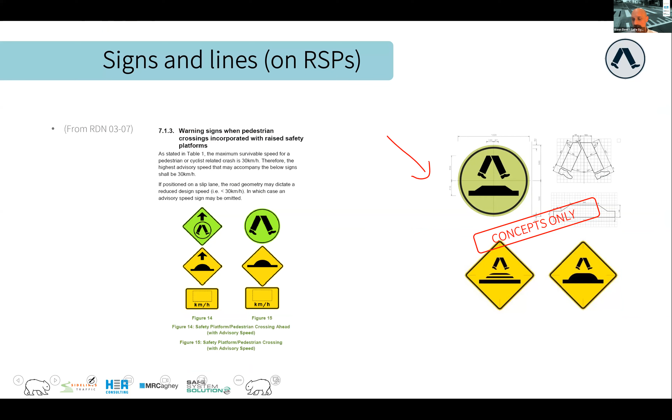Sorry. This is a concept we're coming up with as different Australian standards are looking at it, because instead of having to do all of that, the legs, the raised thing, we at least start combining a few. I think that would be helpful.

Piano key marking in Australia, and of course in AS1742, you can find all the details about that. The little triangles in New Zealand, which are a nice little feature. UK similarity there, and the diamond on the approach as an option. And there you can see one from New Zealand as well, and the difference is the legs. They use this little doohickey. I can't remember what it's called though.

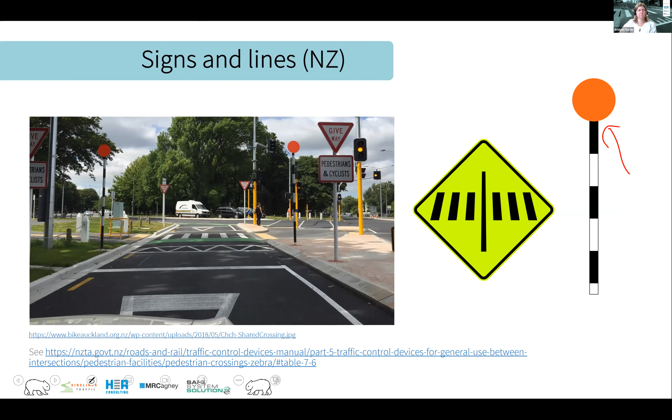Belisha? Yes, Belisha, thank you. Prize for you, Bridget. Yeah.

And then there's some different, so you saw there in quite a few of my photos that when you have a shared path or a cycleway that crosses a road, what you essentially mark it as is an intersection. Okay, you are creating an intersection where you would use a give way and a give way so that that is a road which has priority, the same way we would if it was an actual road that went through there. See that there? This is like saying that there's a road. So that's how you sort of think about the signage of those.

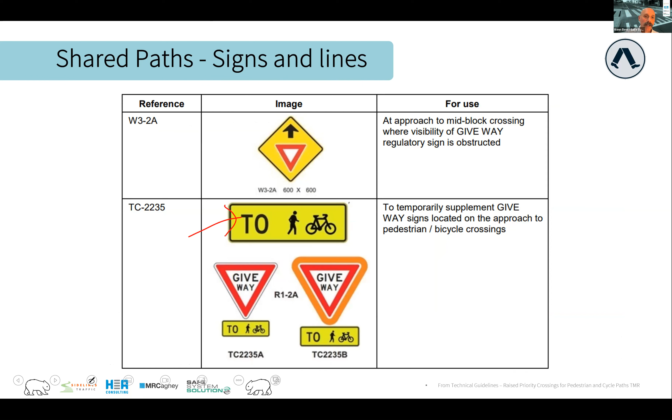And you'll see there that every jurisdiction at the moment seems to be using Queensland's signs for this, although I understand Victoria is coming out with a standard signage, but you use your give way and then your TO pedestrian and cyclists underneath. Some stuff in there pointing you at some different references associated with when you would use flashing lights or not, tactile ground surface indicators, raised reflective pavement markers, all in there coming out of the different Australian standards or supplements, which I think are good.

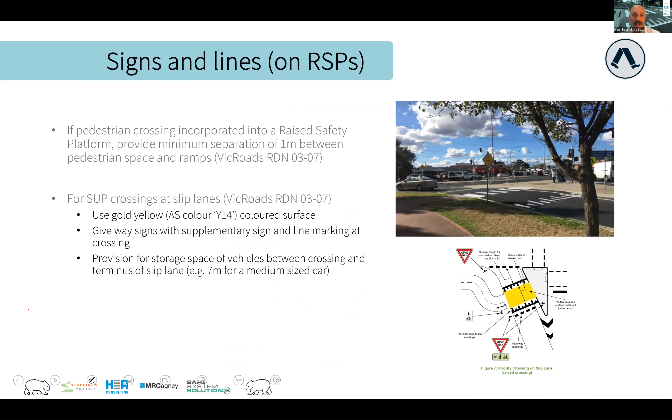And you come up with very interesting signage scenarios, slip lanes, shared paths to slip lanes, and then the combination paths and the like, where this is sort of this whole crazy signage stuff that we've got to do, but you're giving the regulatory setup for the pedestrians to cross, you're giving the give way to cyclists for the cyclist facility to cross there, and that's the way that ends up meeting your requirements.

See this one, there's a lot of signs on there trying to tick off all those boxes. Always keen for innovation in this space, so if you've got good ways to do this, as we were trying to consolidate signage, as you saw in those mock-ups, I think we need to do a little bit of work on it. It's just too much signage.

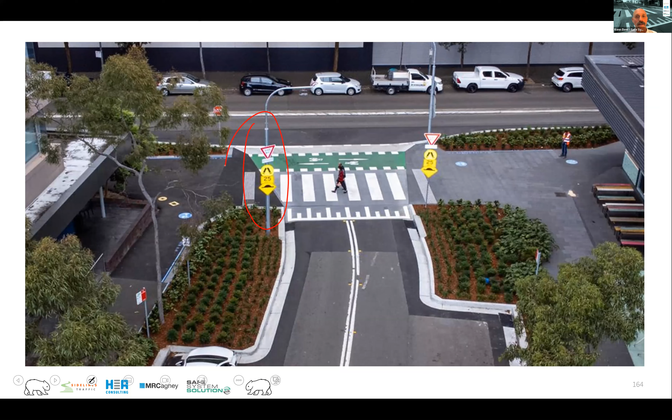My last one, which I'm not going to talk in detail on, is just your pavement and your pavement setup, and then we could do a whole course on this, couldn't we? I'm not a pavement expert, but the one important thing I think to remember is boxing out your pavement in order to ensure that you get a defined lip and this doesn't chip away.

The concrete is much easier to get defined changes than the asphalt, because the roller will flatten things out in its own right. So yeah, concrete can be really beneficial. You can see it here, really nice concrete, a bit more expensive and a bit harder to construct as well, but you get some really wonderful results if you're able to go with that. You can also colour it a bit, so your white stands out a bit.

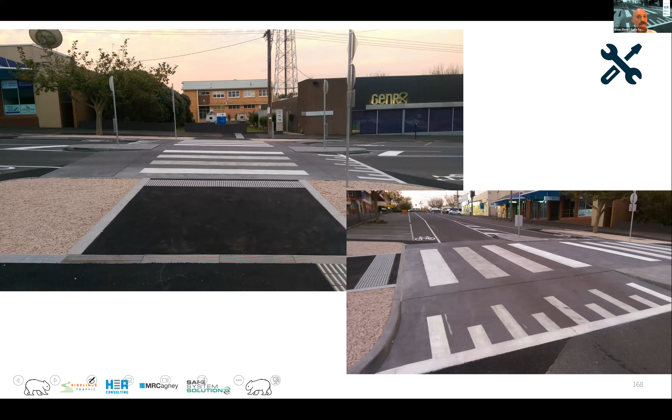Okay, any questions come in there, Bridget? I did race a little bit to just tick off some of those things there at the end.

Yeah, an interesting question around raised pavement markers, RRPMs. The question says for road humps, but kind of just as a speed management thing. I've seen some of them on shared user paths, which I think are a good idea. What are your thoughts on those?

Yeah, so I think I pointed at a part of the Australian standards that talks about them. Again, it's about the scenario you're in, because you would lay them across the front of the pedestrian crossing to highlight that it's there, and that's important if there is a higher speed vehicle approach or the like, but in the lower speed environments, it's not seen as important.